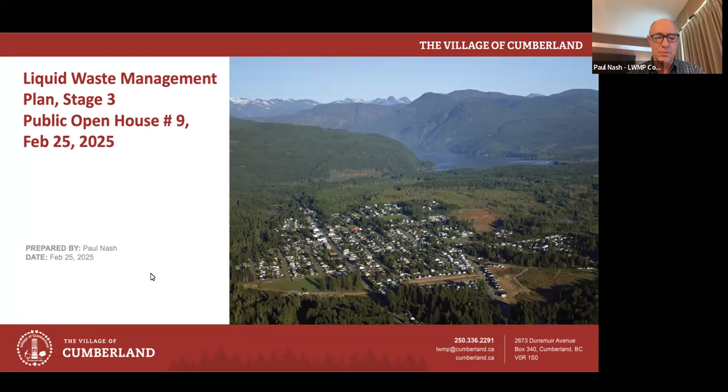So, what I'm going to go through in today's presentation: the LWMP history, what we're doing today, what's going to be in the final report, a little bit of an update on the environmental impact study and what came out of it. And then these 3 points in bold here are the main part of today's presentation. What we're seeking input from the public about is how quickly to do the separation program. So details on that, and then we'll finish off with how it goes from here. So with that, dive right into it.

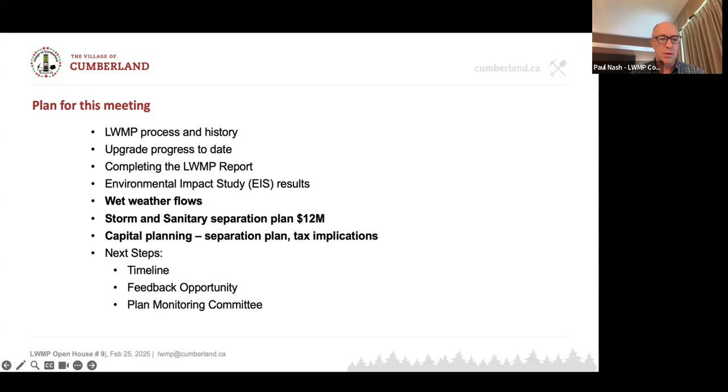So what is this process? LWMP, which is a lot easier to say than Liquid Waste Management Plan. Right, a provincially defined process for developing a long-term plan for managing wastewater and other liquid wastes. And a key point for all of this is it is not just a strategic plan, it is a regulatory authorization. And it's not just an authorization, it's an obligation. So once this plan is in place, it actually comes with legal force that says we have to do certain things and to certain standards.

And then the third leg of it is a financial plan that allows us to pay for doing those certain things. So it's not just a strategic plan like a parks master plan or other municipal plans. This one is unique in that it is also a regulatory plan and a financial plan, all wrapped up into one beast.

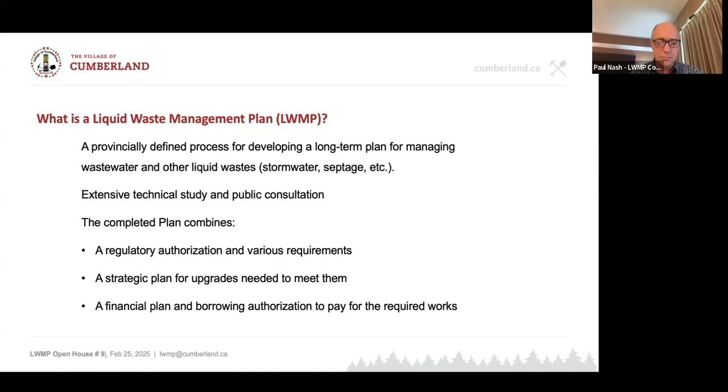And before we got into developing this beast, a few other things happened in Cumberland in the distant, not so distant past. Probably the key point for this history diagram is when the sewers were first installed back in 1910, we had this combined storm and sanitary system. And combined sewers are something invented by the ancient Romans over 2,000 years ago. Everything went into a pipe and went to a river or the ocean.

And it was only in 1968 for Cumberland that the wastewater treatment lagoons were constructed. And at about that time, they stopped doing combined sewers and started building separated storm and sanitary sewers. And you're not allowed to build a combined sewer system today. It's a thoroughly outdated system, but parts of it still exist and haunt us still.

Then over other years, we did more studies on how to do the wastewater treatment. And we finally started this liquid waste management plan process in 2016. We had public committees going, open houses, etc. And that led to the lagoon upgrade project that is in progress. And I've got an update on that in just a minute. And then here we are in the final stage of the LWMP to wrap up the planning process.

So over a century of history here, and how it started out with the combined storm and sanitary is what we're going to finish our discussion on here today. So it's come full circle.

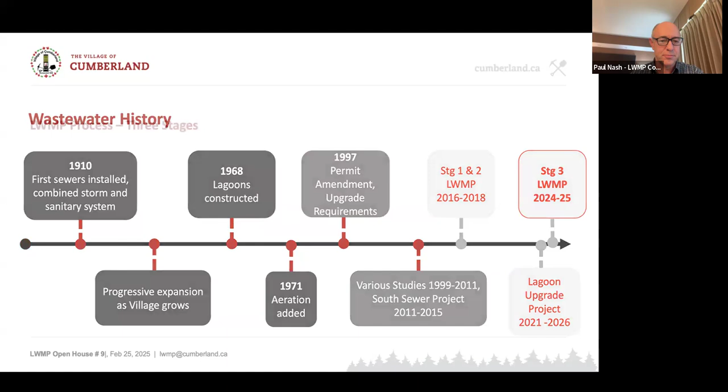The LWMP process itself, 3 stages. We did stages 1 and 2 in 2016, 17, 18. You start out with broad thinking to identify everything and all the ideas and options. And then in stage 2, we whittle it down and select our preferred option, which we did back in the day about the lagoon upgrades.

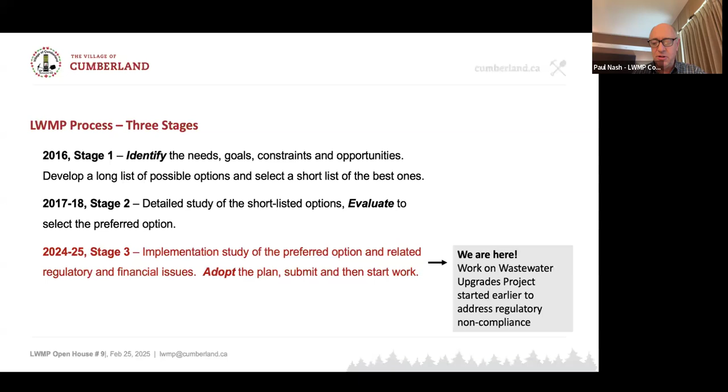And then stage 3, here we are now, detailed study. And in Cumberland's case, we actually started work on the upgrades. They're in progress because we are well and truly out of compliance and need to get into compliance as quickly as we can. So once we'd worked out what we're going to do, we started that, and here we are finishing off the rest of the plan, even though work is already underway.

And what was this work that's underway? What is it? The lagoon system. The main reason why we decided to stay with lagoon treatment instead of a mechanical treatment plant is that it can handle very high flows, which is a defining feature of Cumberland. There's only one type of mechanical treatment plant available that can do an equivalent job with high flows, and we concluded we're better off to stay with the lagoons and add tertiary treatment to them.

Treatment system size is for a future population of 8,000 people, and that's the 20-year planning horizon, what Cumberland's population is expected to be. In extreme wet weather, excess flow bypasses tertiary treatment but still gets disinfected. More about that a little bit later. But yeah, it happens about every second year where the weather is extreme enough that it would cause that with our new system.

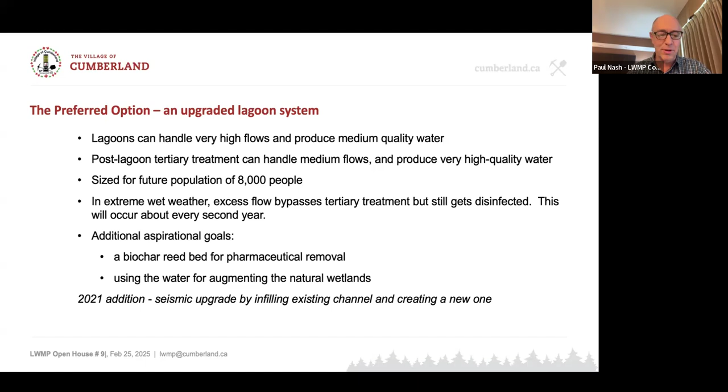We had these aspirational goals from the planning process of pharmaceutical removal and to use the water in the adjacent wetlands, and we'll be doing that. And then the last one here that came up in 2021, seismic upgrade, where we'll infill the channel and create a new one. The creek being right next to the lagoon berms is not a good thing from a seismic point of view. And we all got a good reminder just last week that seismic planning is not just a theoretical aspect. We actually do get some real earthquakes here. So that got added into the mix.

And here's what it's going to look like when it's built. We're underway already, but we have the two lagoons. Down at the bottom there, the three colored boxes represent the post-lagoon treatment to turn the medium quality lagoon water into high quality disinfected effluent. And then it will get sent up the left here, the blue arrow, and in dry weather, or the first part of the flow, goes to the reed bed. And when we have moderate to high wet weather flows, some of it will bypass the reed bed and go into the wetland directly, and it follows the dotted line and then over to the creek.

In extreme wet weather conditions, down the bottom right here, the dotted yellow line, this is water that, when our tertiary treatment capacity is full in wet conditions, any extra water that is coming in or out of the system gets disinfected and goes directly to the creek. So these extreme wet weather conditions still happen. It's unavoidable in Cumberland, so we have to have a system to do that.

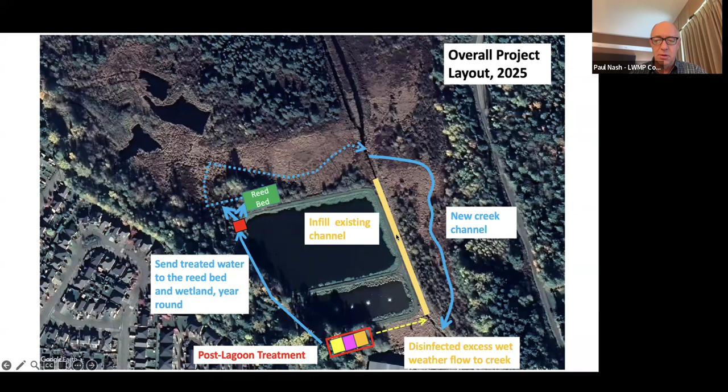And then over on the right here, infill the existing channel, the yellow bar, and we get to build a brand new naturalized creek channel where the blue line is. And that grassed area where the blue wavy line is, is actually the natural low point of these wetlands. So that's where a creek channel would be. And the existing creek channels are all man-made. They were dug in the 30s to drain this swamp for farming. So we're going to renaturalize it to some extent.

So for the project, it's in progress. This is what's happening. We had some delays and false starts while certain things had to be redesigned. We got back into it in December last year, and construction is underway right now. We expect the treatment process to be starting up in the first quarter of next year, and that construction project will then wrap up shortly thereafter. The reed bed and the wetland channel relocation works can't happen until the new system is up and running. So those bits will happen in the summer of 2026, and that will then complete the overall project.

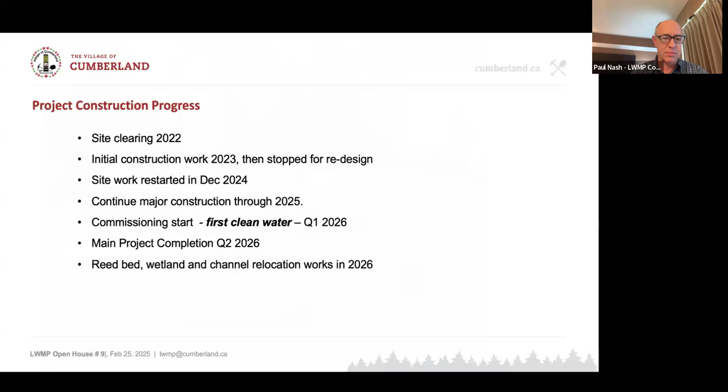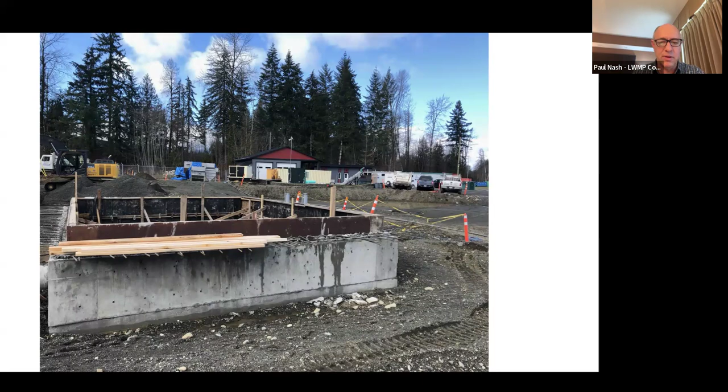And a site photo taken just the other day. Like any construction site, dirt, equipment, and concrete. And as the year progresses, we will see less dirt and more equipment and more concrete. And the big tents will go up in the middle of summer. So lots of activity happening, and that construction will carry on through the rest of 2025. But it's good to finally get going after all these years. So that's the fun part.

Now back to the stage 3 LWMP itself. We have to complete a report and submit it to the ministry. It has all of these mandated components. The two in bold I'll talk about in just a moment, infiltration reduction plan. But basically, everything gets documented and reported in. It's a summary in some regards of what we've done over the years, and also included in there the wastewater treatment plan and budget. So an update of where we're at compared to what we had proposed in 2018. And so there have been a few changes to the plan and certainly to the budget, unfortunately. So we capture all of the up-to-date information in this report.

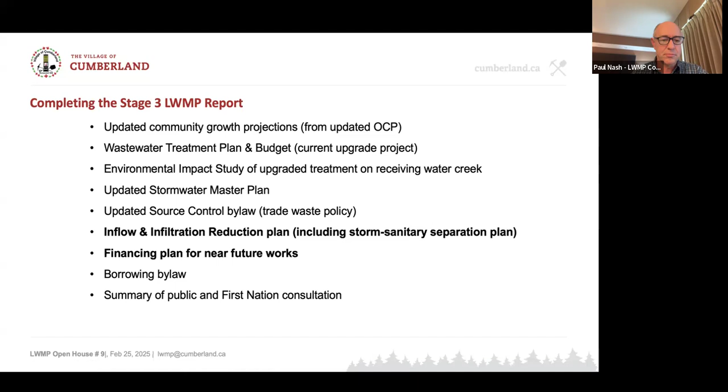We want to make sure that the water in the Trent River is good enough for further use by other parties downstream if they choose to do so, and protect the aquaculture in Baynes Sound as much as we can. This one here about some dissolved metals in the water, for example, copper, that's actually coming out of copper pipes in the village. So when the water is used as drinking water, it's relatively clean. And then when we receive it as wastewater, it has some dissolved metals in it. This is not a problem from toxicity or so on, but it's just interesting to note that things like this happen.

So then the last part is, once the upgrades are done, we then do quite a bit more environmental monitoring than what we're doing today to see how well we're doing, and hopefully no further treatment is required. The treatment will be high quality, and then the reed bed and the wetlands will do further polishing on the water. So we don't know exactly how good it's going to be. We can only tell once we're actually up and running, but it's good enough to meet all the regulatory requirements.

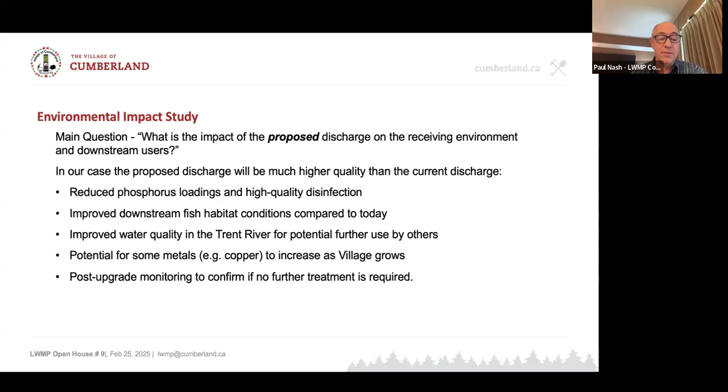So then the wet weather flow. The defining feature for Cumberland is extremely high wet weather flows. In dry weather, we have 900 cubic meters a day, or 900,000 liters. And in wet weather, it goes up by a factor of 20, and it used to go up by a factor of 30 a couple of decades ago. So the village has done storm sanitary separation works starting in about 2010, the Dunsmuir trunk main being the biggest single project on that.

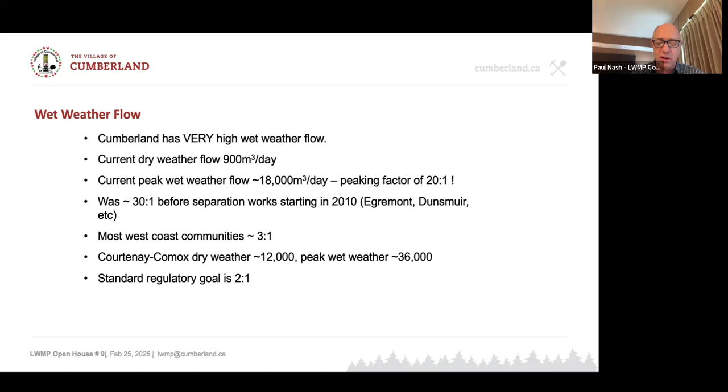So they've made a difference, but most towns here in coastal BC, the wet weather peaking factor is in the order of 3 to 1, and just the example here of Courtenay-Comox, they're right in that ballpark of 3 to 1, and the regulatory goal is 2 to 1. So Cumberland's peaking factor, when we have wet weather flows of 20 times the dry weather flow, is huge, and it's been quite a challenge for the treatment system to be able to handle that.

Illegal roof connections to sanitary sewer. Those unfortunately do exist, and the village will do some work to try and identify these, but houses that were built in the old combined areas had no choice but to connect to the combined system. And once you separate it, it doesn't necessarily mean that the house reconnected to the storm sewer. So a roof connection, when it rains, contributes a lot of water very quickly to the wastewater system, and we want to try and eliminate those. Then points 4 and 5, there's always some infiltration that just can't be avoided. That's why you have peaking factors of 2 or 3 to 1.

And the last one, in Cumberland's case, the lagoon surfaces. There is 36,000 square meters of surface, and if we get 100 millimeters of rain, that creates 3,600 cubic meters a day of flow just from rainfall on the lagoon surface itself. And 100 millimeters of rain in a day is a very wet day, but it has actually happened several times in the last decade, and that is our design wet weather event.

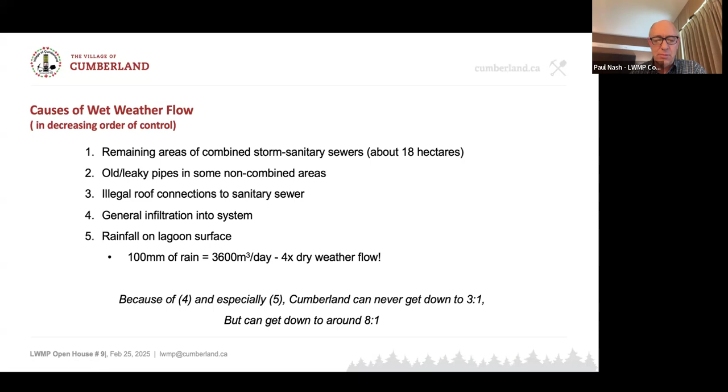Since we can't avoid the wet weather flows entirely, we have to deal with them. The lagoons are still working even when flows increase, providing biological treatment. Our tertiary treatment will handle 7,200 cubic meters a day, 8 times our dry weather flow. The excess wet weather flow disinfection system will handle flow above that, which can't go through tertiary treatment on extreme wet days but will get disinfected before going to the creek. We have nominally 7,200 cubic meters a day of capacity for that, but it can handle even more. The system is designed to protect the environment against water quality impacts from these large flows. We know they're going to exist, so we have to make sure this wastewater is treated and disinfected the best we can before it goes to the environment.

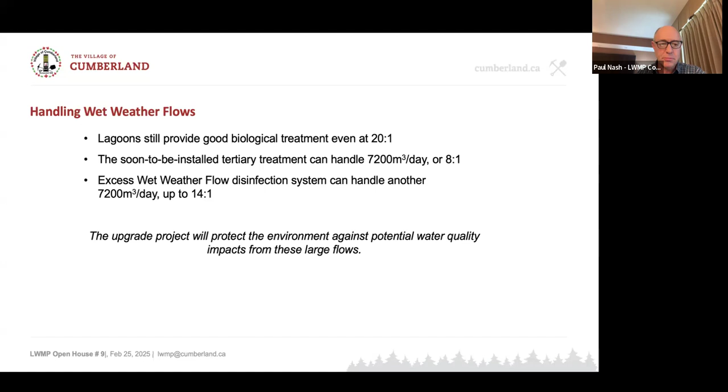Given that, we still need to do the separation program. You're not allowed to build a combined storm sewer system today, and you have to work to get rid of combined systems you have. Part of the LWMP is Cumberland has to commit to separating it. There are 14 projects for about $12 million, a very expensive task because you have to dig up roads, replace and install 2 different sets of pipes, and reconnect everything. It's quite complex work, so it's expensive. Assuming we don't have to do any further treatment works, this separation is the remaining large capital work for our program, and we can't avoid doing it.

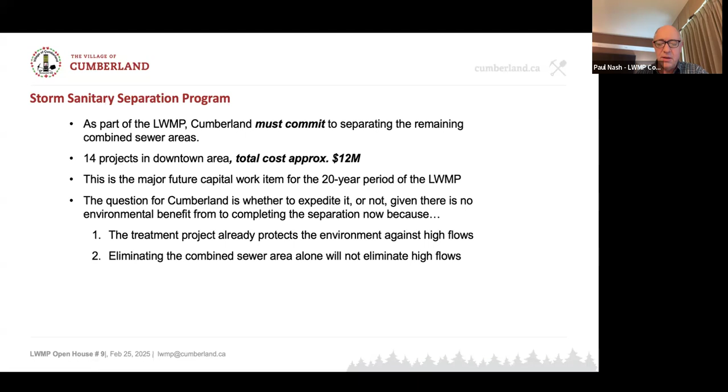The question then becomes whether to do it quickly or not, because we've already taken quite expensive and complex steps to treat the water in wet weather conditions. The environment is already protected, and eliminating the combined sewer area alone will not eliminate these high flows. Because of those 5 different points, we're going to attack one of them here, but it doesn't mean the wet weather flows are gone, it just means they're reduced.

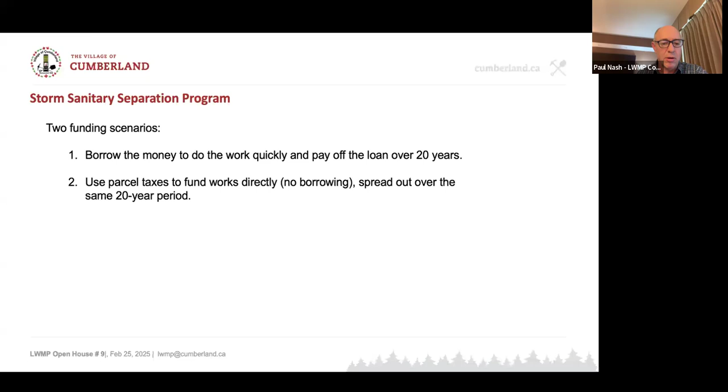For that $12 million worth of work, there are 2 possibilities for how to do it: borrow the money to do it all as quickly as we can and pay it off, or spread the work out over 20 years and use parcel taxes to pay for it directly. In that case, we don't borrow and we're not paying interest. So that's the 2 different scenarios. Here's how they look.

I've got columns there saying 50% grant funding. Cumberland will always try to pursue grant funding for these sorts of projects, which we may or may not get. So the scenarios here are if we do or don't get it. If we borrow and race ahead to do it and we don't get grant funding, that's an additional $513 per parcel or per house per year for the next 20 years. In the no-borrowing, all-tax column, it's $330 per parcel per year for 20 years to do the same. And if we get 50% grant funding, we're down at $165. Quite a range of costs there. A parcel, by the way, is also a condo unit in a condo building - that's considered a parcel for these purposes, as is a business.

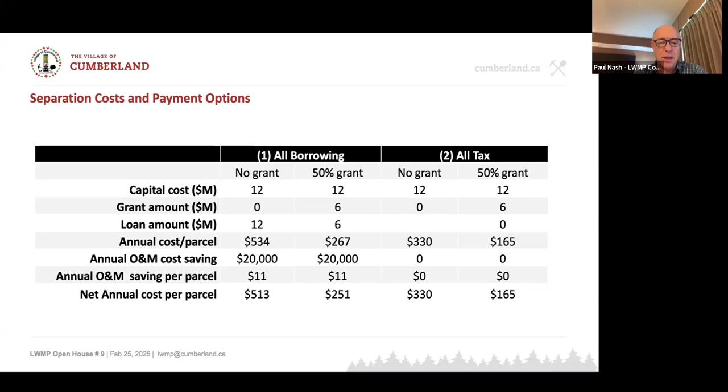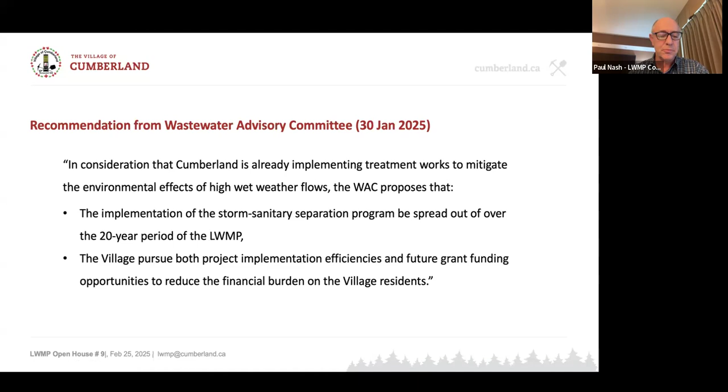Our Wastewater Advisory Committee weighed in on this question too, and this was their position on it. The bottom line is the village will always pursue project implementation efficiencies and grant funding opportunities. But the point is, we think we can do considerably better if we're doing that rather than racing ahead. What that led to - well, I'll get to what it leads to in a moment. What it adds up to is perhaps more accurate here.

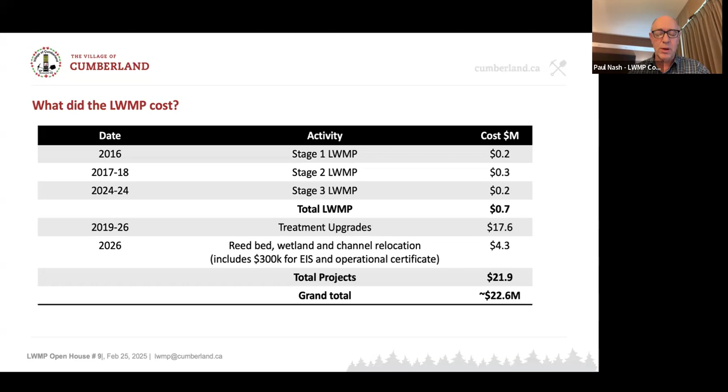Our LWMP process: 0.7 million on the planning process, and the projects - you can see the treatment upgrades underway, 17.6 million, a very high number. The phase 2 stuff is another 4.3 million. We end up with a $22.6 million project. All of this is being done and has to be paid for before we get to the question of the storm sanitary separation program.

What that means is we have some substantial costs to begin with. These projects, 22.6 million from the previous page, we actually have almost 50% grant funding for them, and we end up with a cost per parcel of $333 to pay off the loans required for the treatment project. We also have annual operating costs we'll have to pay - the new system is more expensive, we can't avoid that - so an annual O&M cost or user fee of about $330 per parcel.

And then we get to the storm sanitary separation program, which you have to add to the others. We've used the lowest cost option here of $165 per parcel, assuming we can get 50% grant funding and some efficiencies. We end up at the bottom line of $830 increased cost per parcel per year for the wastewater program. If we were to go the route of all borrowing and implement this quickly, you'd add $350 per parcel per year to that bottom line.

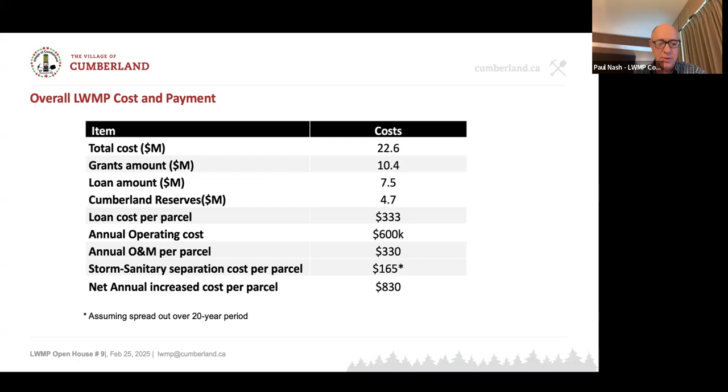So the one variable still up for discussion is how fast or slow we do the sanitary separation program. That $165 could go up to $513 if we went as fast as possible, and the $830 becomes $1180 if we did that. So that's the question to be resolved.

Here's how the rest of the LWMP will play out over the next few months. We've had the public open house and our last committee meeting on the 6th. We'll finish our draft report, send it in, and get comments back from the ministry. It goes to council in May, and we submit it in finality mid-May. We expect sign off at the end of the year by the Ministry of Environment, but it might take a little longer.

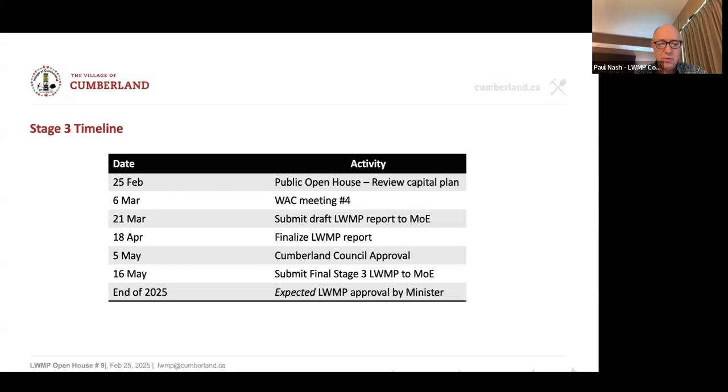For members of the public, what do you think? The input we're looking for from you is about this storm separation program. It's the last remaining public input piece. So if you think we should do it fast or slow, let us know with the feedback form.

A technical point about the borrowing: it gets authorized via the LWMP. There is no other assent process that you would normally have for long-term borrowing, because the province deems that this has happened through the process of the LWMP. It's one of the few exemptions to the requirements for electoral assent. The intention is that the municipality can then implement this plan that we've spent years working on and had extensive public feedback on, so this is your last chance to give feedback—please let us know by putting your comments in the feedback form.

Once all this is done, Cumberland gets to create a plan monitoring committee and look at how things are going, and it goes back to the Minister of Environment for reviews at 5-year intervals. So those people who like being on committees will get another chance to do so.

And that is it. Once we're done, this is what we'll have—what we intended right at the start: a high quality, sustainable system. Resiliency wasn't a word that was in there at the time, but it is these days, and that means adapted to the unusually wet and dry conditions we experience here. So it'll be a great product once we're finally done. And that is the end of my presentation. Thank you.